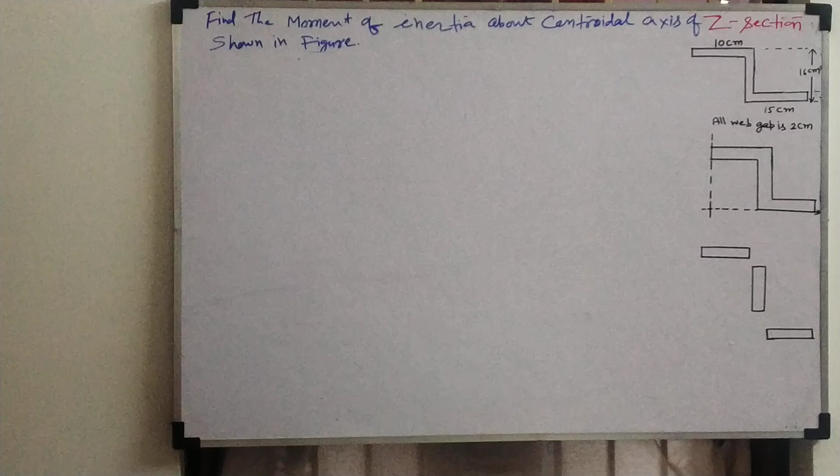Today I am going to solve a moment of inertia problem. We are going to take a Z-section, with all the dimensions given. I will solve it using a very simple method with simple steps. So now let us start our work. The question they will ask is: find the moment of inertia about the centroidal axis.

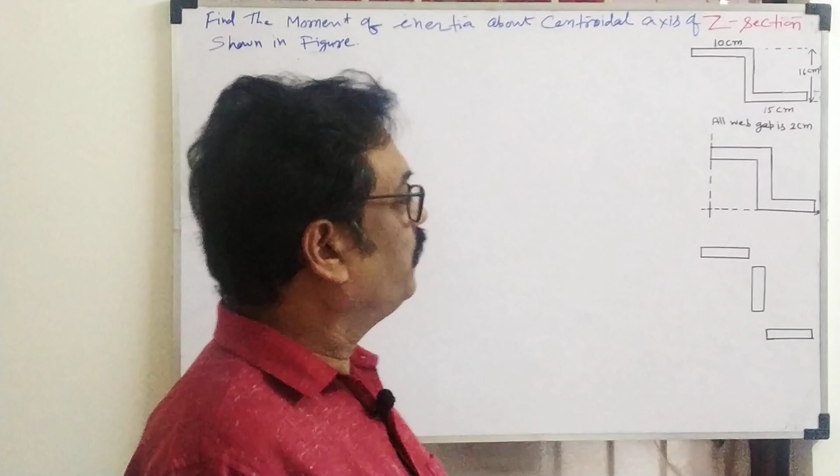So once we find the moment of inertia, we have to calculate the center of gravity first. Without the center of gravity we cannot calculate moment of inertia, because with that center of gravity, how much area it covers - that is known as moment of inertia, which we are going to find out.

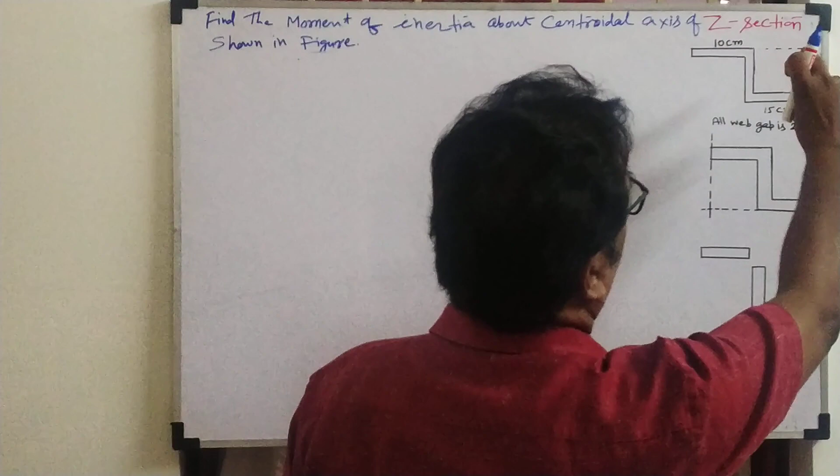Now see the Z-section given. Top flange they gave as 10 centimeters. From top to bottom they gave 16 centimeter distance, and bottom flange they gave as 15 centimeters.

Generally in moment of inertia problems, the Z-section dimensions are given in mm, like 150 mm, 200 mm, 160 mm. So what we will do - you can solve keeping mm, but once you do the calculation part, it becomes very long. Suppose they give 100 mm, 150 mm, 160 mm, 20 mm - this gap is 2 centimeters, so 20 mm, because already you know 1 centimeter equals 10 mm.

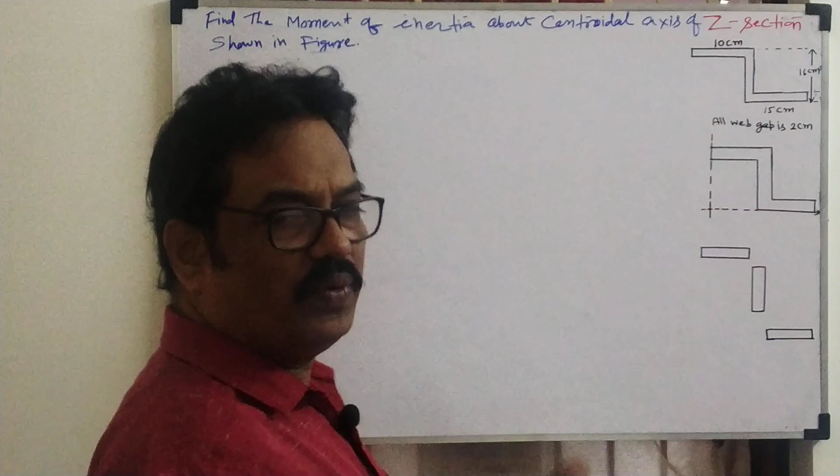So what we'll do now - first we'll convert all the given distances or lengths into centimeters. This will make our calculation work easy, and afterwards we'll convert centimeter back into mm. That will be a very simple concept. So now that we did - given big dimensions, generally you will see they give 100 mm, all dimensions in mm. Okay.

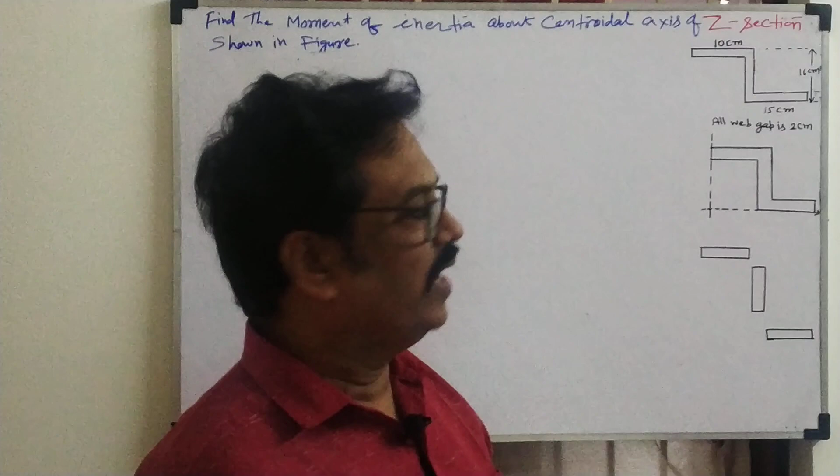Now the first work, already I told before in the previous video I uploaded - first work is to take the axis of reference. So the axis of reference I will take in the first coordinate. This is y, this is x. Why I am taking this now, I explained in the previous video. Again look here why we are doing like this, keeping our given section in the first coordinate - so that both x and y will be positive.

Suppose we go to the second coordinate - x negative, y positive; third coordinate both negative; fourth, x positive, y negative. So negatives are coming. In that case, dimensions will take some plus, some minus. So avoid this - we'll keep our given section always in the first coordinate.

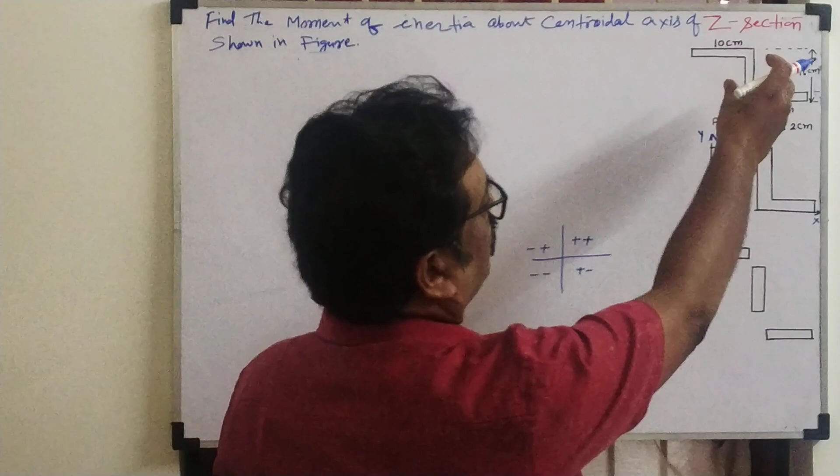So see this first coordinate. This is origin 0,0. That means this Z-section I kept in the first coordinate - that's the very first step. Next step will be to cut the section.

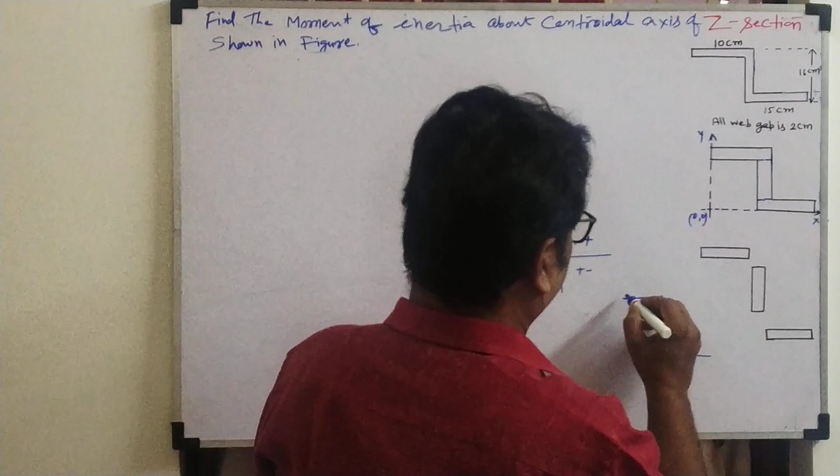We'll cut the section, because the Z-section looks like 3 rectangles. So we'll cut the sections - you take this way and take this way. Even you can take - suppose the Z-section is there - you can cut it this way also, nothing wrong. So you see here I cut it this way, this middle, and all the length, however much length there will be, depends on what way you are cutting.

Suppose I cut it this way - this will be 10 centimeter, this will be 2 centimeter. This will - how much will it take? Total 16 is there, minus 4 gives 12 centimeter. This is 2 centimeter. Then this is 15 centimeter, and this is 2 centimeter.

According to this, suppose I cut it this other way - then what will this be? This will come to 8. This will come to how much? Total will come to 16. This will be 16, then this will come to 13.

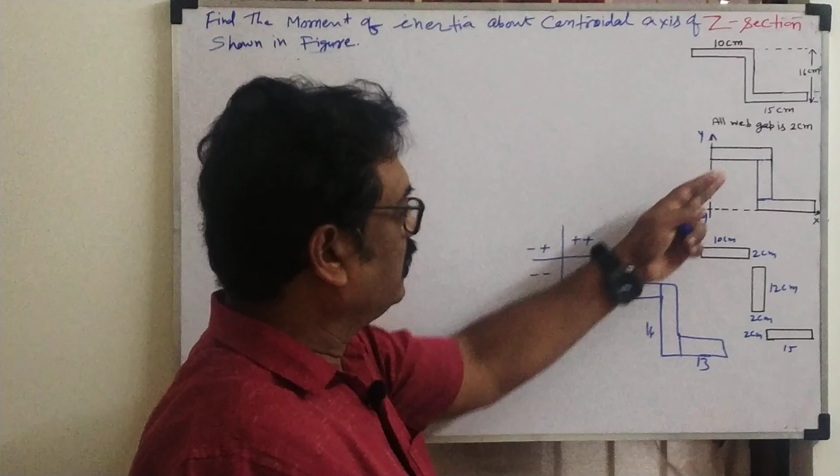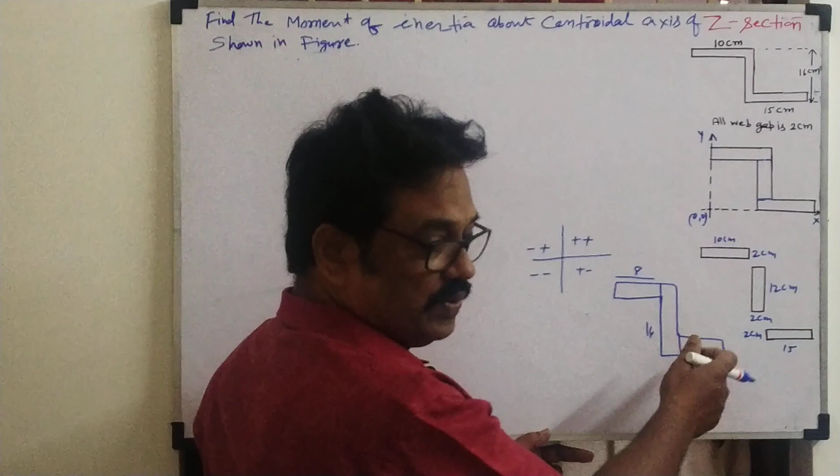Okay, so either this way or that way. This way will be very straightforward - a little easier for us to calculate. This way is a little confusing - sometimes if you take this length only, you have to take the center of gravity as this total distance plus this distance, half of this. If section 3 is there, in comparison this is a little more difficult - you can't say difficult, but less easy compared to the other method.

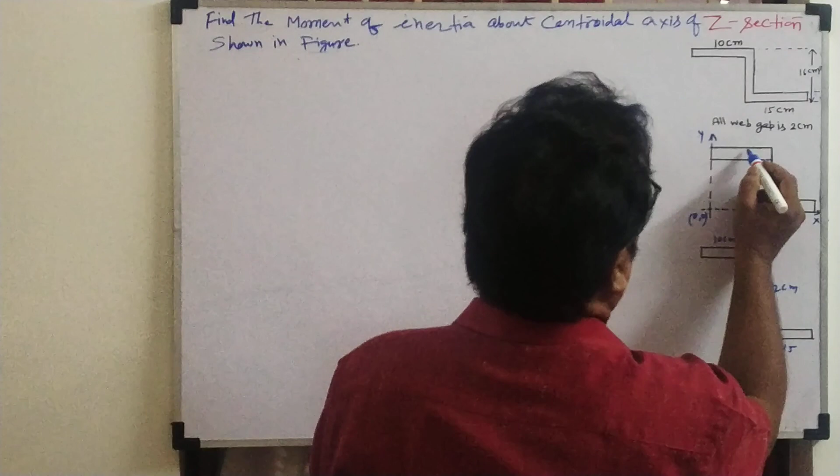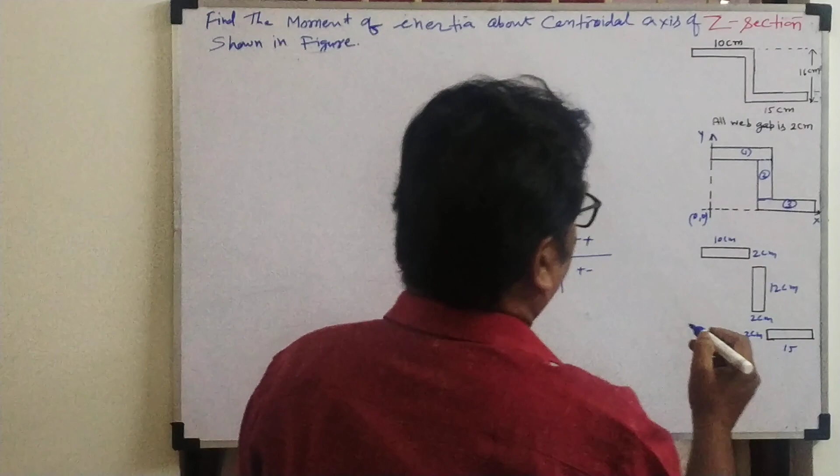Okay, so now I've taken this section. Now we'll give the names - give this first one, this is 2, this is 3. The naming, you can give any order - any one can be 1, 2 or 3. Okay, so this is 1, 2.

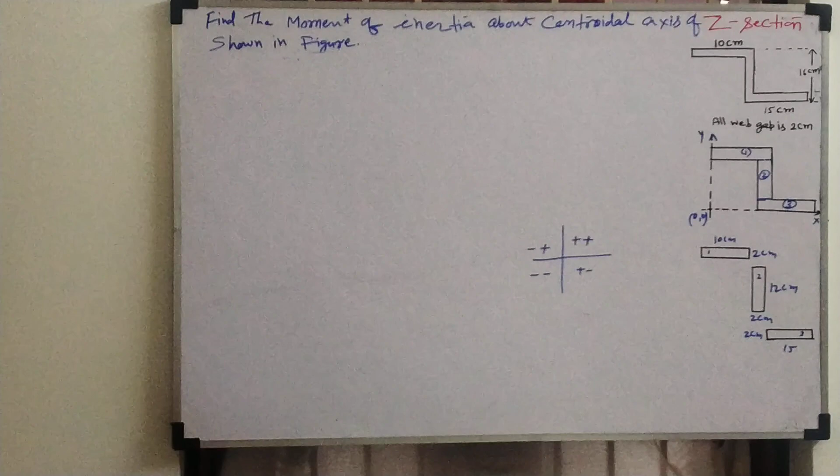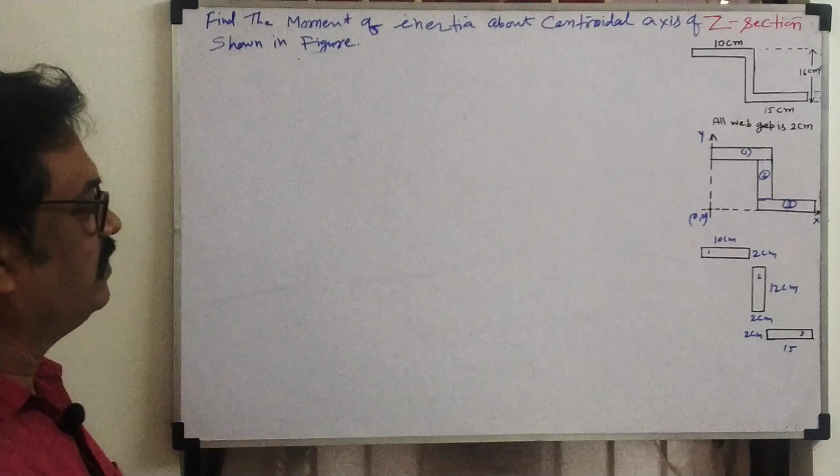Okay, so we have taken sections 1, 2 and 3. These 3 sections we have taken. Now in step 2, what we did: first we took the axis of reference, then we cut the section, dividing it into 3 sections.

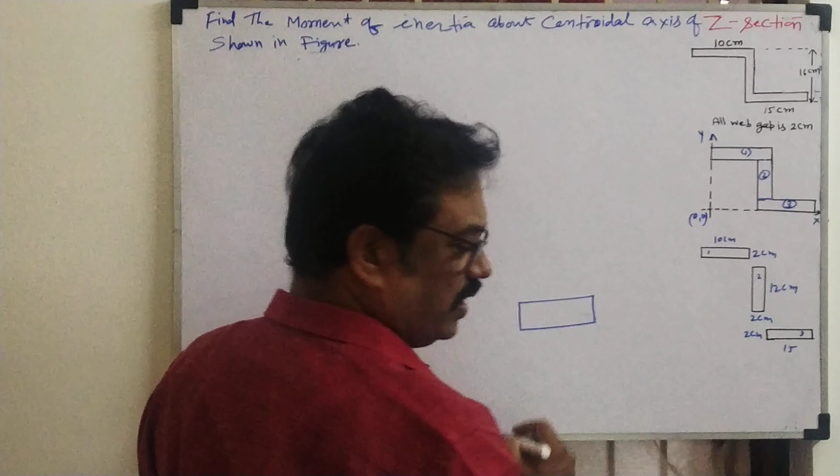Already in the previous video we explained what is the center of gravity for an individual section. For individual sections, it's at half distance. Suppose this is B, so this is B by 2. This is H, so this distance will be H by 2. This is the CG point. So X bar, Y bar, the CG point will be B by 2, H by 2.

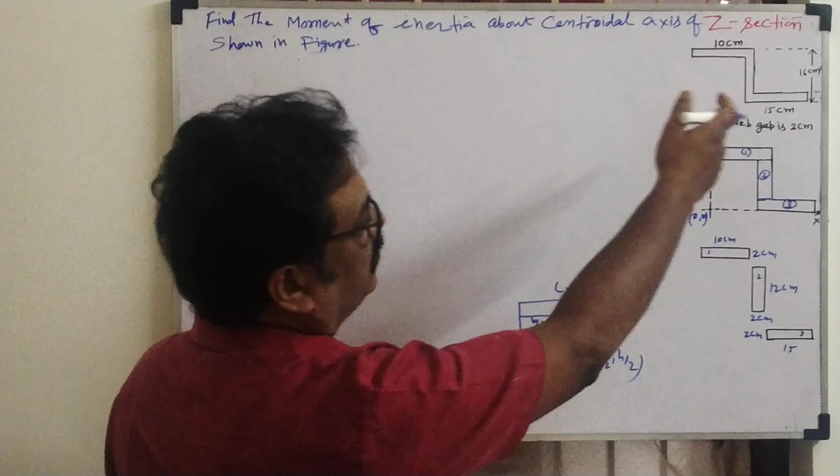Why? Because for one section I know this, but here 3 sections will be there, so we will use the formula. But once we find the individual section CG, that half distance will go either horizontally or vertically. This is the horizontal distance, this is vertical. So horizontal means this is the X bar, this is the Y bar.

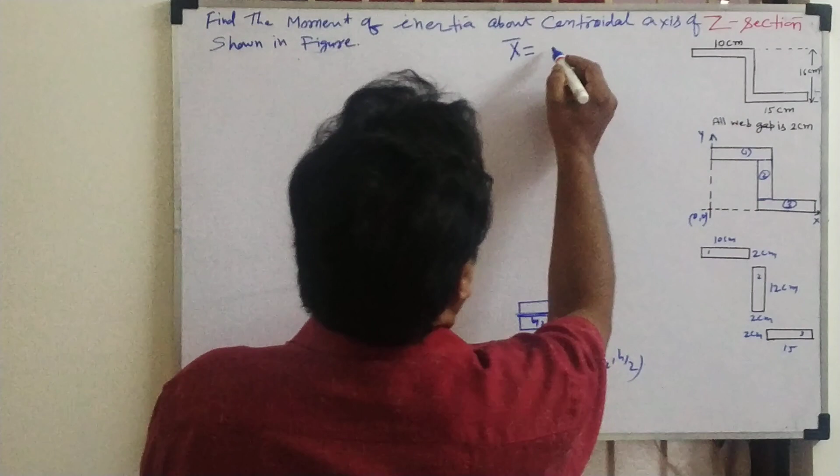So this we are going to do, so we will write the formula. What will be the formula here? X bar equal to, we are taking the symbol for center of gravity about the X axis, the final center of gravity. So 3 sections are there, so you will write A1 X1, A2 X2, then A3 X3.

divided by total area, A1 plus A2 plus A3. What is A1? Area of the first section. A2 is area of the second section. A3 is area of the third section. X1 is individual center of gravity for section 1, X2 is individual center of gravity for section 2, similarly section 3. Then what is Y bar? A1 Y1 plus A2 Y2 plus A3 Y3, divided by total area A1 plus A2 plus A3.

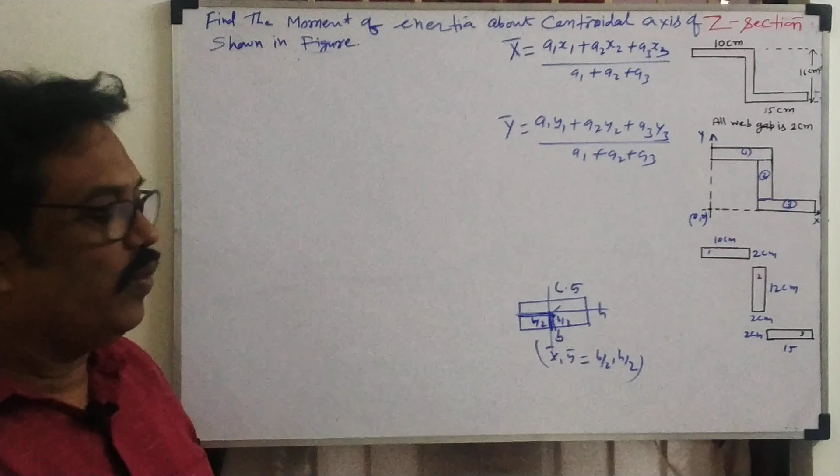So I wrote this formula. Once I wrote this formula, now what is unknown here? The area, all 3 areas will be found out. X1, X2, X3, individual center of gravity for each section, will be found, and similarly Y1, Y2, Y3 will be found. Once these are found, we will substitute and get the center of gravity.

So okay, now let's start the calculation part. Right here, A1, look at A1. Already this area, that portion we've taken out, so it will be easy for us. First one, what is 10 into 2? 10 into 2, so 20 area, centimeter into centimeter square.

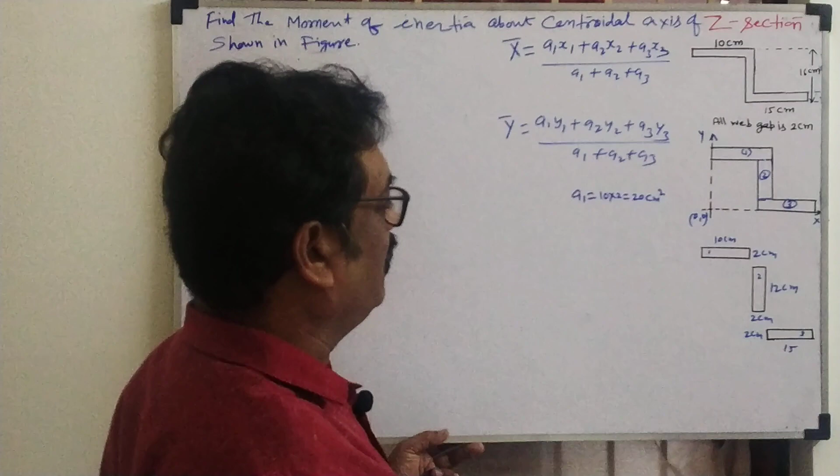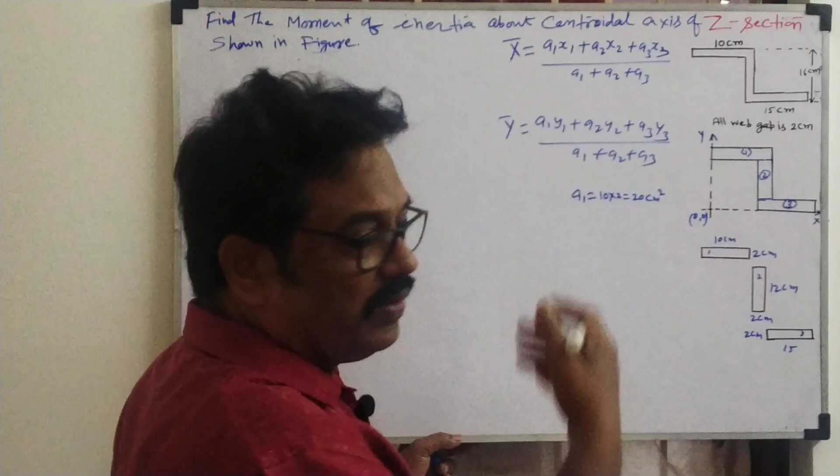Suppose you see here 100 mm, if we keep it in mm it would be 100 into 20, so big calculations will come. So finally we'll convert, it's not a matter. So whenever big dimensions are given, we'll convert into centimeter. If too much will be there, we can keep meter also. But see that any part, anything should not come in decimal. So that you should not assume, that only you have to take care.

Now A2. A2 will be 12 into 2, 12 into 2, 24 centimeter square. Then A3, see the third section: 15 into 2 equal to 30 centimeter square.

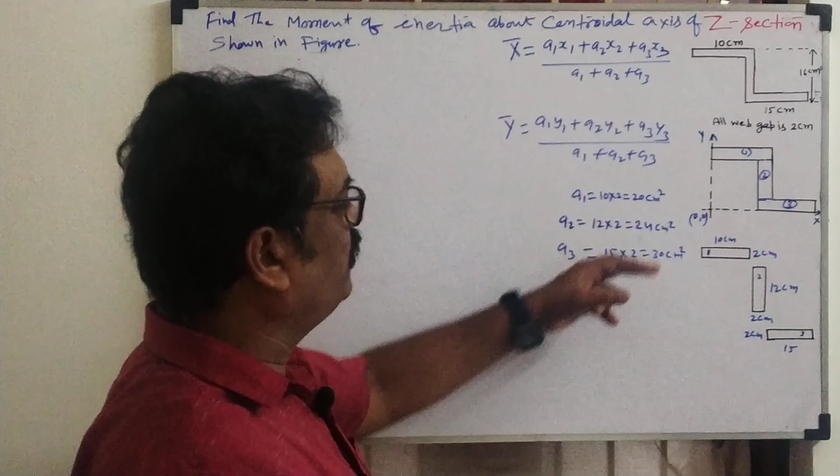So why am I taking them separately? Now it's so easy for us. We can see, okay, first portion this, second portion this, third portion this. Don't directly look at it all together only - nothing wrong in seeing it that way, that's also okay, but this way it will be simple. You are looking only at section 1 as a rectangle, 10 into 2, then 12 into 2. Like this you can answer.

Now X1, X2, X3. What is the individual section's individual center of gravity of that particular section? So now we always take this value from the reference axis. Suppose X1 is there, so this is the reference axis, this is the first block. How much distance? 10. So it is connected to the axis of reference, so 10 by 2, 10 by 2.

Then the second one. How much thickness? 2. So we'll write X2 equal to 2 by 2, half distance 2 by 2. But what is this length? We have to calculate. So total length is 10 minus 2, this length will be 8.

So 8 plus 2 by 2. So total how much will come? 9 centimeter. This is called 5 centimeter. This is 9 centimeter. Okay. Now third one, now this is the length.

How much this length? 15. So X3 will be 15 by 2. But where is this block? After this distance, this distance how much again? 8. 8 plus 15 by 2. So 7.5, 8, 15.5 centimeter.

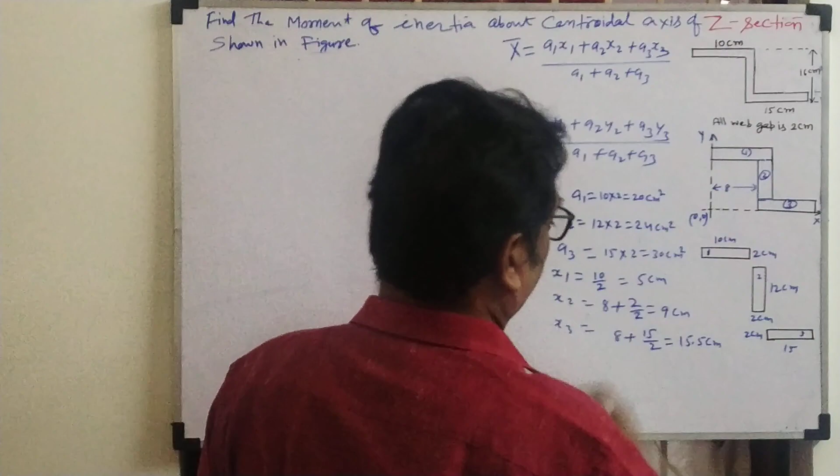Now suppose you have questions. Sir, why will take that X from the Y axis? Why will take Y1 from the X axis? That already previous video explained. So again you look here.

Suppose this is the line I draw. This line is nothing but y is equal to 0 line. This line is nothing but x equal to 0 line. Now suppose you will draw the x equal to 1 line, y is equal to 1 line, where will draw? So first you see the dimension, this is 0, 1, 2. Here also 1, 2. Suppose x equal to 1 line, where will draw?

So this is x equal to 1 line. This is known as x equal to 2 line. So now see x distance, where is measuring? From the y-axis, now see, suppose here, area where we are measuring now, from where we are measuring? From the y-axis, see, measuring from the y-axis.

That's why x we taken from the reference axis, x1, x2, x3. Similarly y, see here, this is y1, this is y2. Suppose you are measuring this y1, from where? From the x-axis. This is called x-axis, but line is y is equal to 0 line. This is x equal to 0 line, x equal to 1 line.

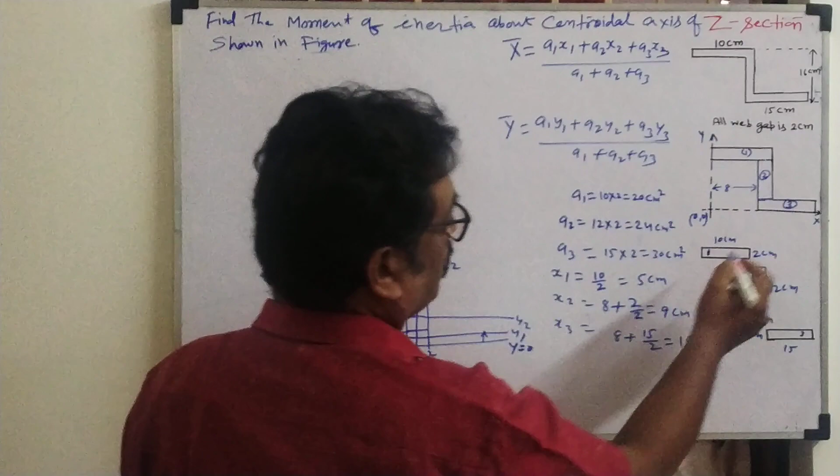So now y is equal to 0 line, y is equal to 1, up like this now. Y, see, y increasing this way. Vertical line, y-axis, so increasing in this way. So that case, for that only we are taking like this only.

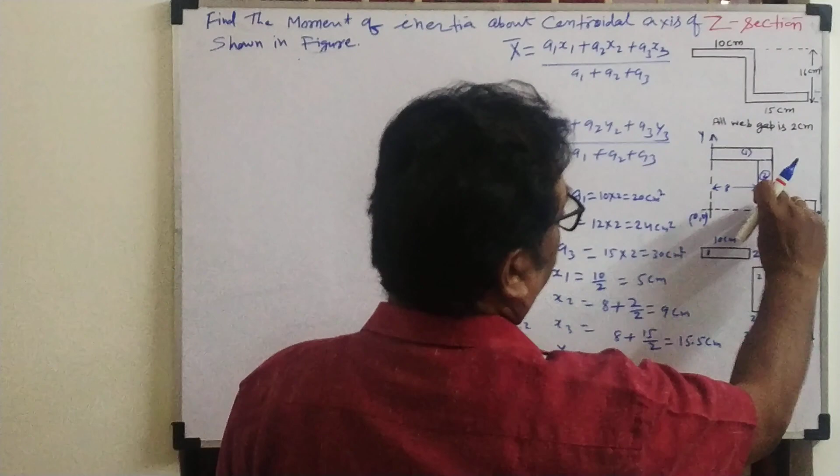Now you see here y1. Y1, what will do? Where is the first section? In top. So this length how much? This length is 2. This length is 12. 2 plus 12 plus this thickness is 2.

2 by 2, because center of gravity we are taking y1 in first one. First one half distance 2. So half distance we take here. So 2 plus 12 plus 2 by 2. So how much will come? 15 centimeter. So y1 how much coming?

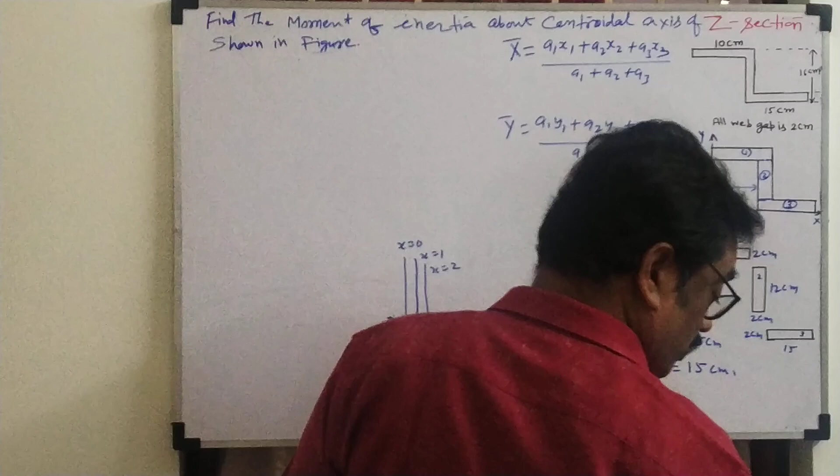15 centimeter. Then y2, you see the y2? This one only. So 2 plus 12 by 2. So 6 plus 2, 8 centimeter. So we are taking like this. Now third section from bottom. So 2 by 2. Y3 nothing but 2 by 2 is equal to 1 centimeter.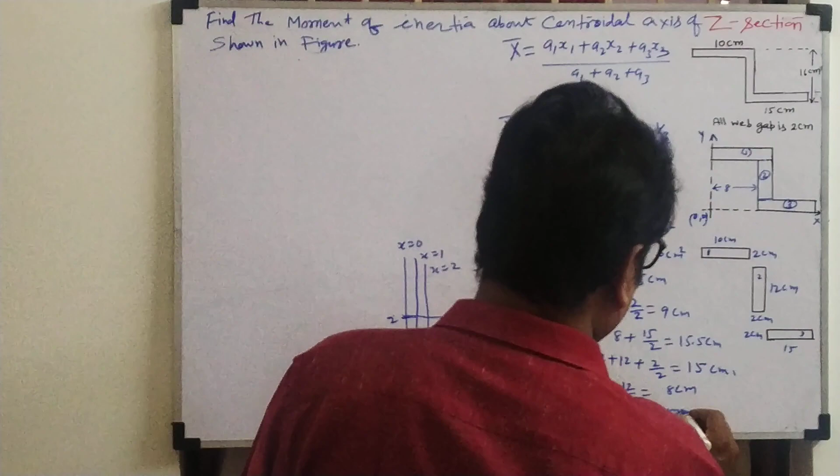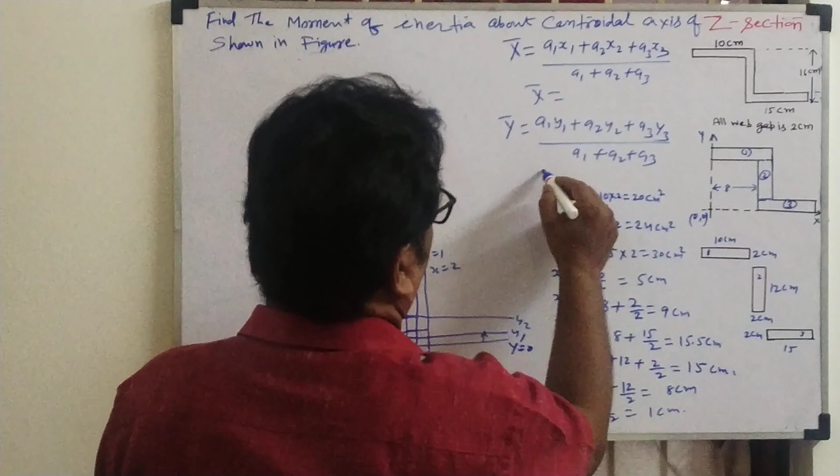So once you know these three things, center of gravity over, now you have to substitute the formula, you will get the answer. Here x bar you will write, you will get the answer. If y bar you will write, you will get the answer. Substitute all the value, you will get the answer. Main problem will be this only, you should know. This concept, once you know, you can solve the center of gravity problems.

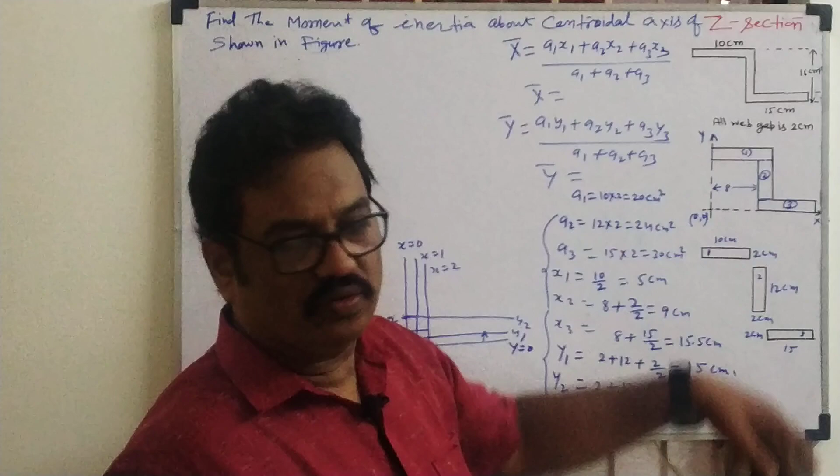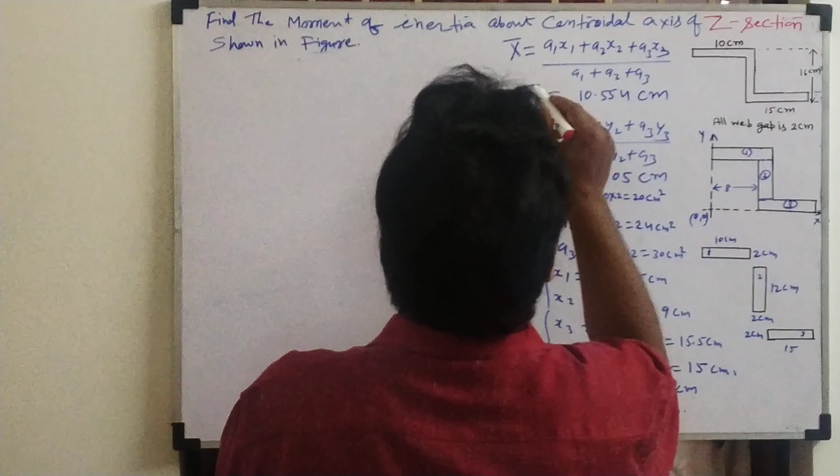Okay, now final value, how much will come? That will write. If x bar you will see, x bar will come 10.554 centimeter, because length. Y bar you will get 7.05. Already we calculated this 7.05. So x bar we know this, y bar we know this.

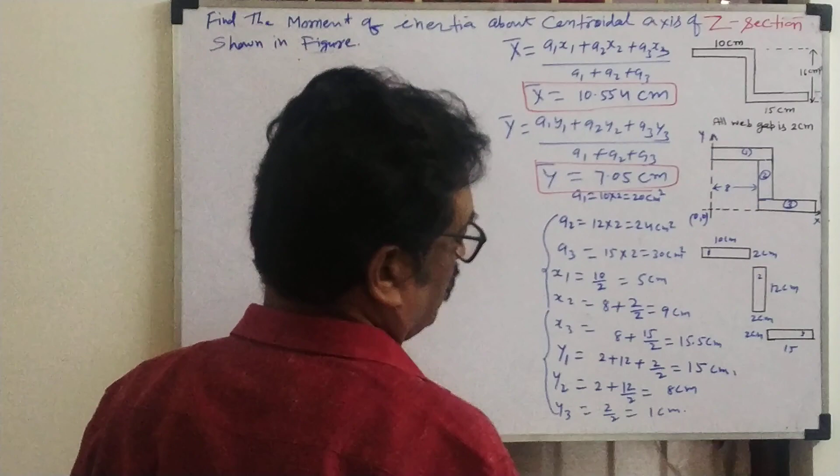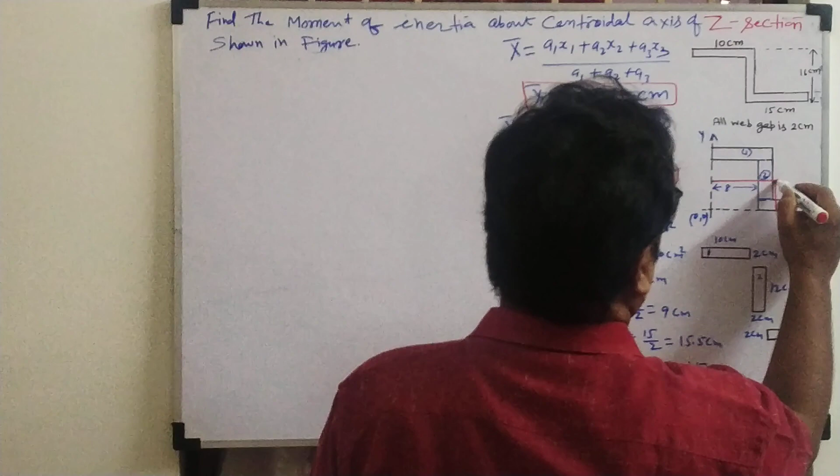So okay, how to represent this answer now? How to represent this answer now? See here, y bar 7.05, x bar is 10 point. So this length is 10. Coming how much? 10. So 10.55, just near somewhere. And if we'll go there, this is coming, so y bar is 7. So it will be somewhere here will come CG point. X bar, y bar, CG point.

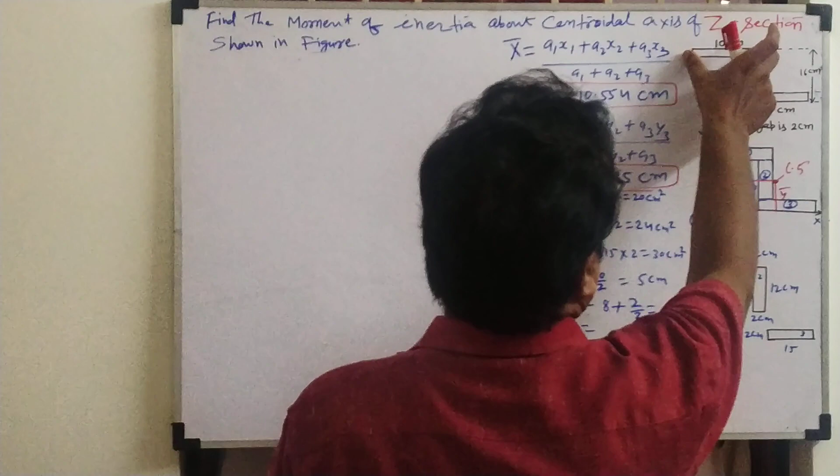Okay, according to the given dimension, generally suppose this length will be less, this length will be more, inside will come. So whatever x bar is coming, 10.554, y bar, so this is the center of gravity distance. So entire section's weight will concentrate in this point.

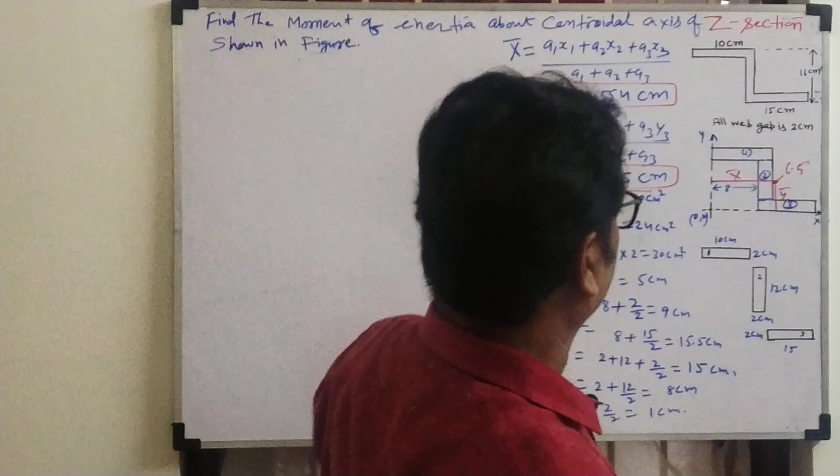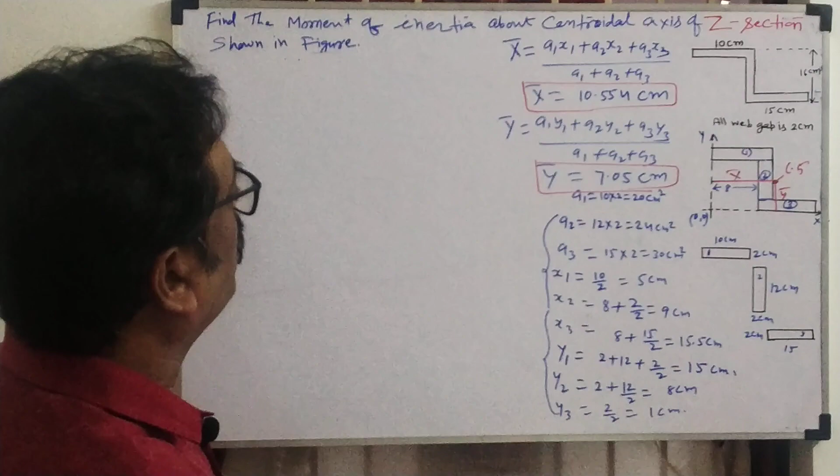So center of gravity over. Now we'll go the moment of inertia. So moment of inertia, almost 90% data we have. We'll write the formula, we'll substitute. That also very simple steps I'm going to explain now. So before this, you know the parallel axis theorem.

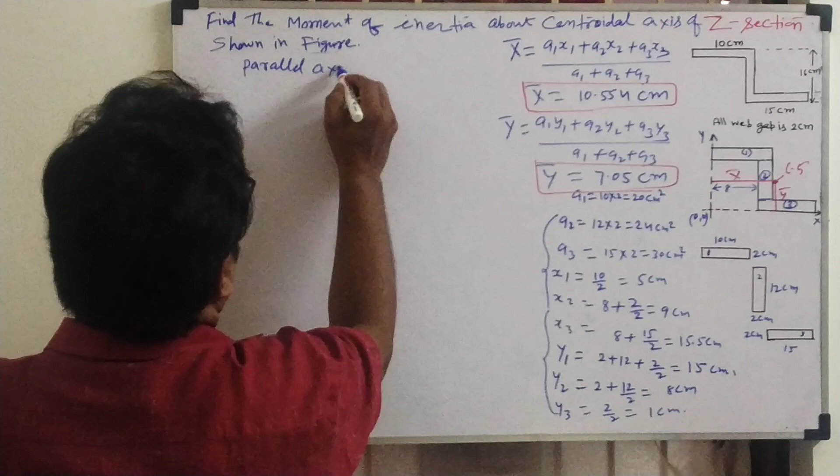Parallel axis theorem. What is parallel axis theorem? Ig plus Ah square. This is the moment of inertia for the section. Before this, we should know the moment of inertia for the single section. All blocks are in rectangle only, so we should know the moment of inertia of the rectangle.

Suppose this is B, this is H. I already told the trick, now I will also tell it. What is IXX and IYY? This is B, this is yy, this is xx. So IXX is nothing but H cube B by 12, IYY is nothing but B cube H by 12.

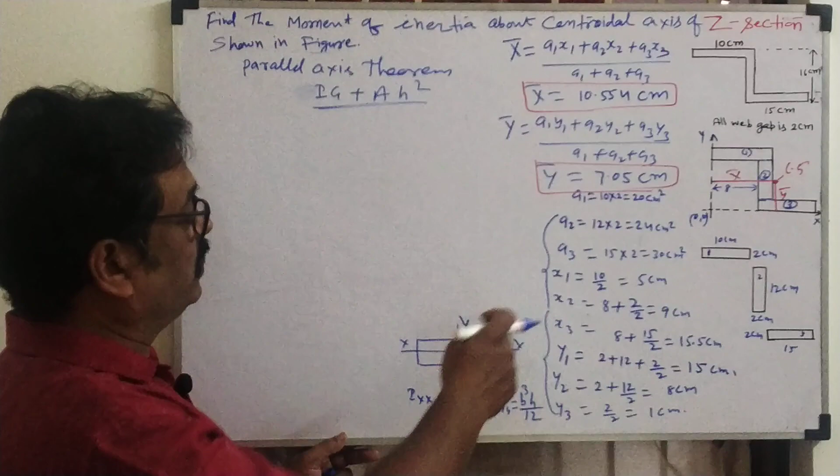How to remember? This derivation is there for how the moment of inertia about the centroidal axis comes, about xx it's b h cube by 12, about yy similarly. How to remember this? One simple trick is there. Remembering these silly tricks is nothing wrong. We have to remember our target is to write the moment of inertia for the single section, since we cannot derive it in a short period.

So see this, how we'll remember. Suppose you draw the x line. See this h perpendicular, this line is going perpendicular to h, so h cube is given. Another way to remember: h is getting cut, h is getting crushed. Crushed means you give it some mercy, mercy means giving some power. This is called support, you supported h, so h cube. Similarly for b, once you draw the line, b is getting crushed, so you give b some mercy, some support, support means power, so b cube into h. So xx gives h cube, yy gives b cube - whichever dimension is perpendicular to the line, that dimension gets the cube.

So this way you can remember the individual moment of inertia of a section, called Ig, for an individual section of moment of inertia, like area. Now I am going to write the formula.

Ixx equals, how many sections are there? Three sections. You write Ix1 plus Ix2 plus Ix3. So what is the moment of inertia formula?

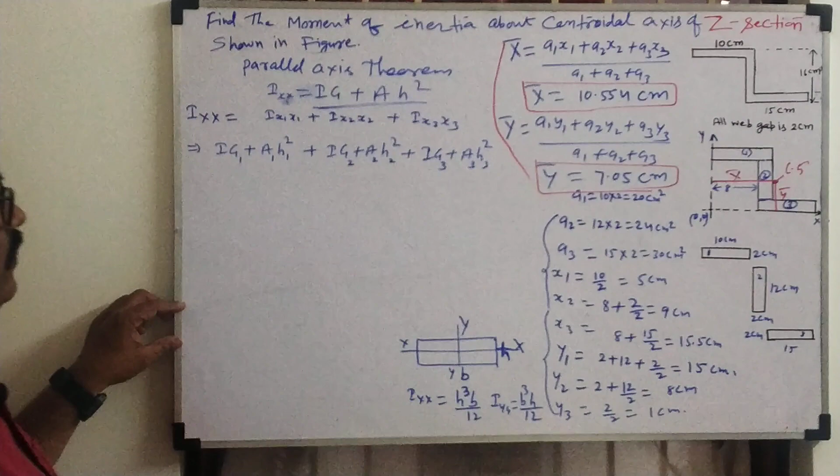This is about xx, so we give x here, right? Now it is clear. Moment of inertia about xx, all xx. Section 1, 1,1. Section 2, 2,2. Section 3, 3,3. What is Ig1?

Now we already have the diagram here. Suppose you think of one rectangle. So what is Ig1 now? We draw the horizontal line now, so 2 cube is coming. What is coming? 2 cube, because the horizontal line gives h cube, so here it's 2 cube into 10 by 12. Individual section moment of inertia written.

Now area we already have somewhere. A1 is 20. What is H1x? I'll write the formula here: H1x is nothing but y bar minus y1. H2x is nothing but y bar minus y2. H3x is nothing but y bar minus y3. So H1 is nothing but the final center of gravity minus the individual center of gravity.

Now you will think, why does Ixx involve y? Why will y be there? For Ixx, the y difference - already you see Ixx you're taking now from the y-axis, and x you are taking from the x-axis. So once you calculate Ixx, it's the difference of the center of gravity, the y difference.

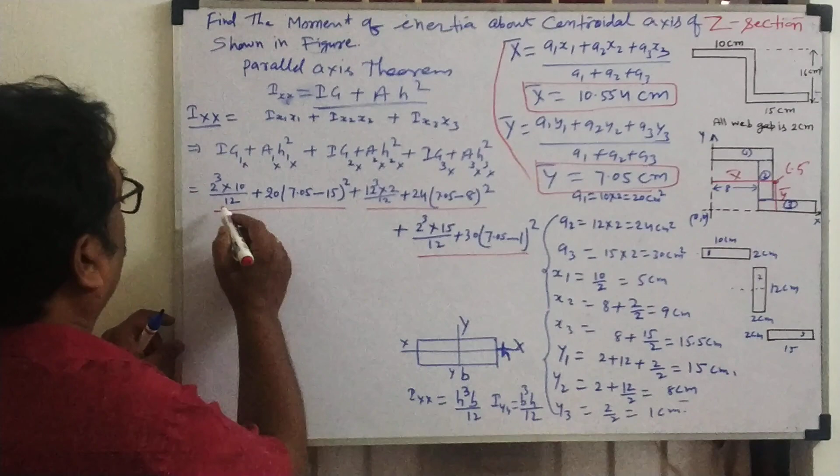But if you remember the steps, any one you remember, repeat 3 times with all the data we have. So finally, if you calculate Ixx, you will get the answer in centimeter power 4. So Ixx, you will get the value.

2688.46 centimeter power 4. Suppose you want to convert now to mm. I told you already dimensions in centimeter is there. I kept it. Suppose you want to convert, just learn 1 centimeter equal to 10 mm. 1 centimeter equal to 10 mm. 1 centimeter power 4 is equal to 10 power 4 mm.

If you will write in mm now, what will you write? 2688.46 into 10 power 4 mm. This should not be written in this particular problem, because already it's in centimeter, this is your answer. But if you are converting to mm, first convert centimeter, just multiply 1 centimeter power 4 is equal to 10 power 4, multiply and write the value.

Okay, so now these things are not required here. Okay, now I will tell how we'll write IYY.

Similar method. Suppose you know Ixx, same things we are going to write here, only the symbol will be different. So y1 plus y2 plus y3. Okay, now Ig plus AH square.

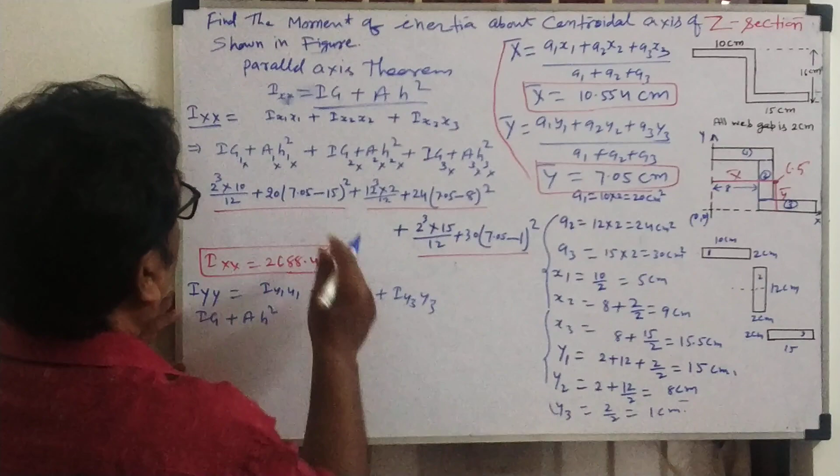Ig plus AH square, see here. Then Ig plus AH square. Again, first you just write Ig plus AH square. Now modify. This is 1, 1, 1.

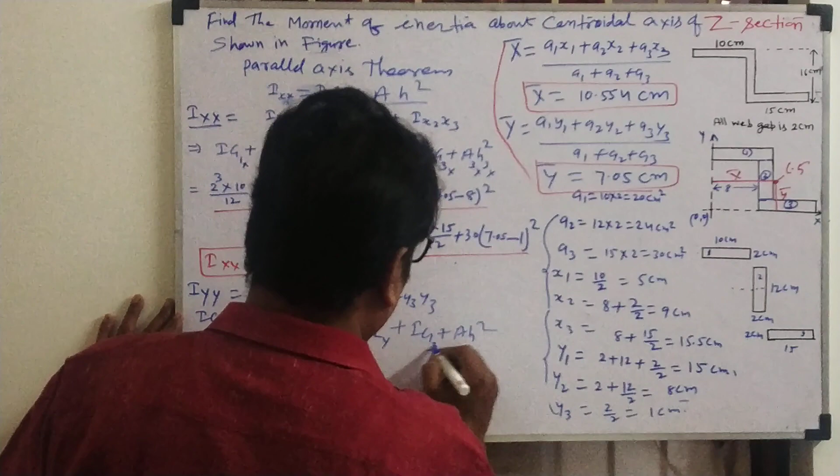In y, so y, 2, so y. Similarly, 3, third section, y. I wrote, so now the formula is satisfied. Now what is Ig1?

With respect to y, first section is 10 cube, so the vertical line is coming as 10, so 10 is getting crossed, no? So power gives 10, so 10 cube into 3 by 12, or reverse of this. Once you are writing xx, just reverse of this you will write, it will get the answer.

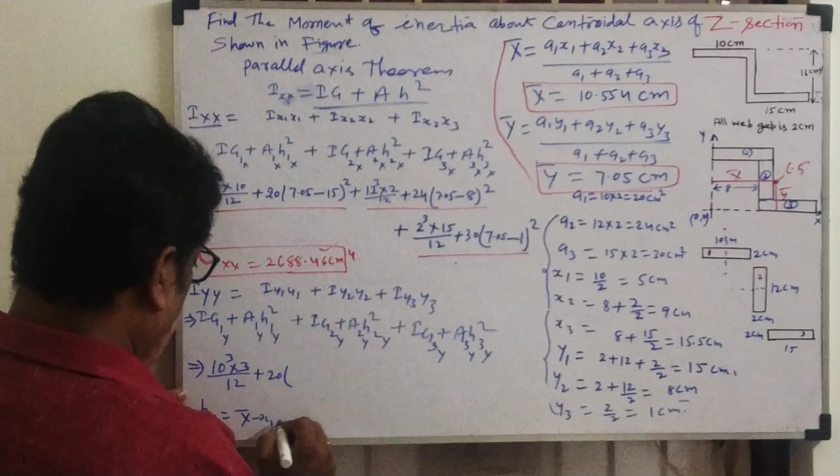Area will be the same, 20, but what is h1? I will write here, h1y is equal to x bar minus x1. If we will take h2y, x bar minus x2, h3y, nothing but x bar minus x3. Here, y, x difference, x, y difference.

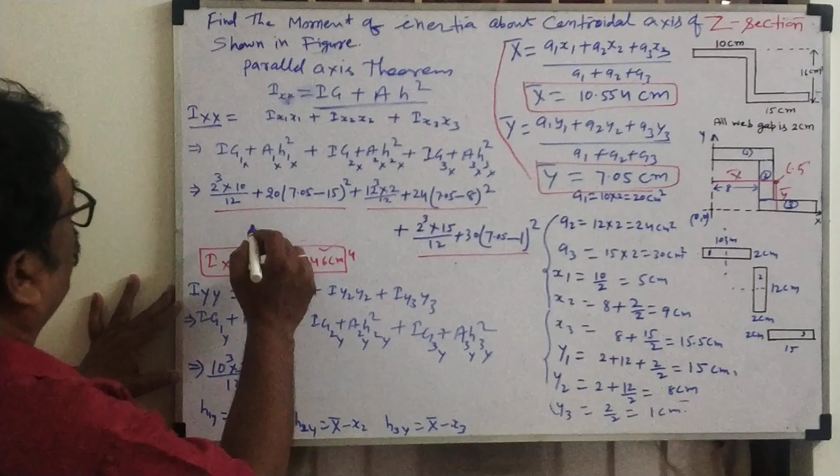So at least I will keep here, h1x is nothing but y bar minus y1. Similarly y2, y3, this you keep it, somewhere you have to write this also. So this for x, this for y. Okay, now area, you know what is x bar?

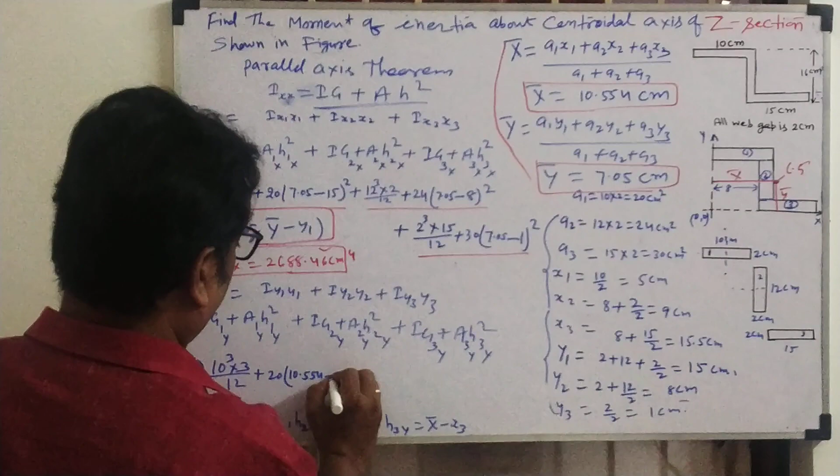10.554 minus x bar minus x1, somewhere there is x1, 5 whole square, plus Ig2, not second one, vertical line, so 2 is there, 2 cube. Here you see 12 cube, but here 2 cube into 12 by 12, plus area A2 24.

Minus, what is this one, area 24 into x bar. X bar how much? 10.55. 10.554 minus x2, x2 will be 9 whole square plus, now y1 work is over, no?

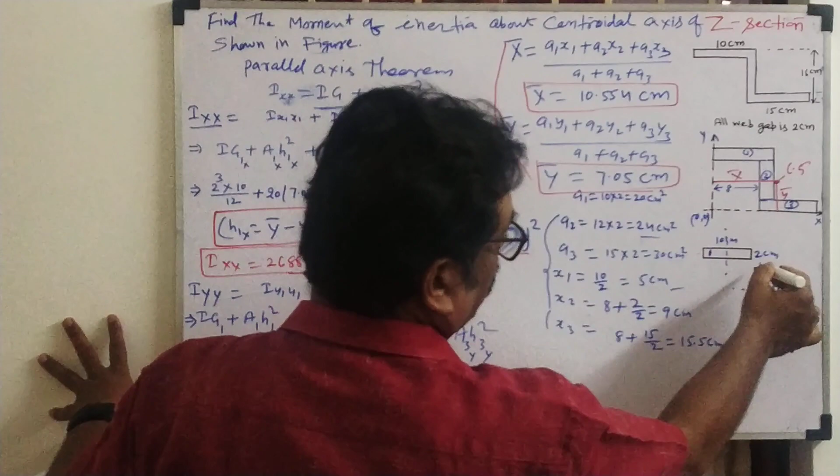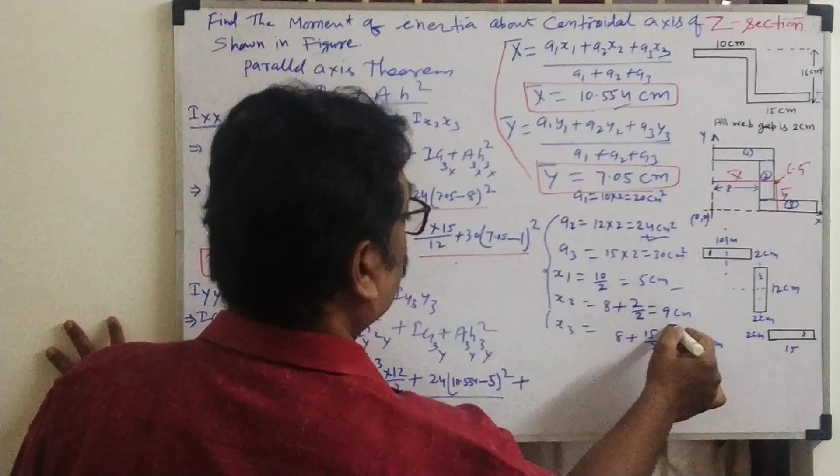Yes, now I will rub out this part. Now see here, plus third section, first section is over, second section is over, second section listen again, because this vertical line 2 per power cube into 12, area A2 is 24, then x bar is this minus x2, 9. Yes, wait, yes, x2 will be 9 whole square.

x2 will be 9 whole square plus Ig3, now vertical, now 15 cube, here what is 2 cube, so what write, 15 cube into 2 by 12 plus area A3 30, then what is x bar, 10.554 minus x3, 15.5 whole square. So okay, so everything we wrote here.

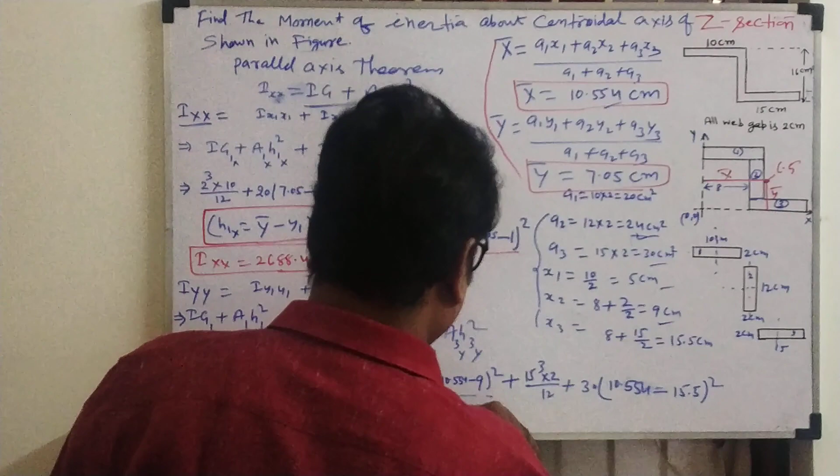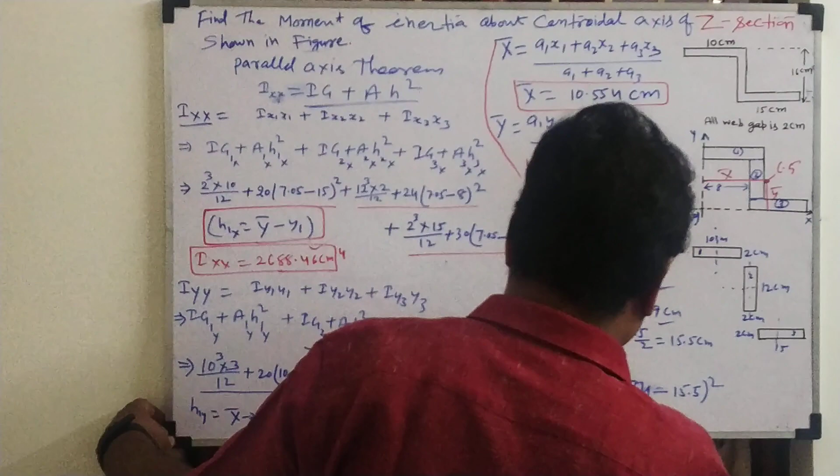Now we will calculate, you will get the IYY final answer. If you will calculate IYY, you will get 2145.96. I calculated 96 centimeter power 4. So now look again.

Concept is this much only. Now this calculation, you have to substitute the value. So substituting the value, now you have to be careful.

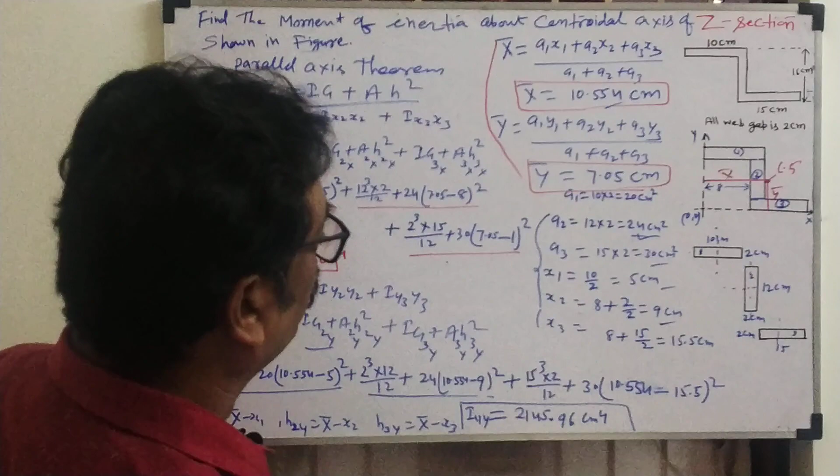YY, na, 10 cube, correct. Reverse of this, check. 20 into x bar here. X bar minus x1. X bar is equal to this. X1 minus 5. Vertical line, 2 cube into 12 by 12. 24 area A2.